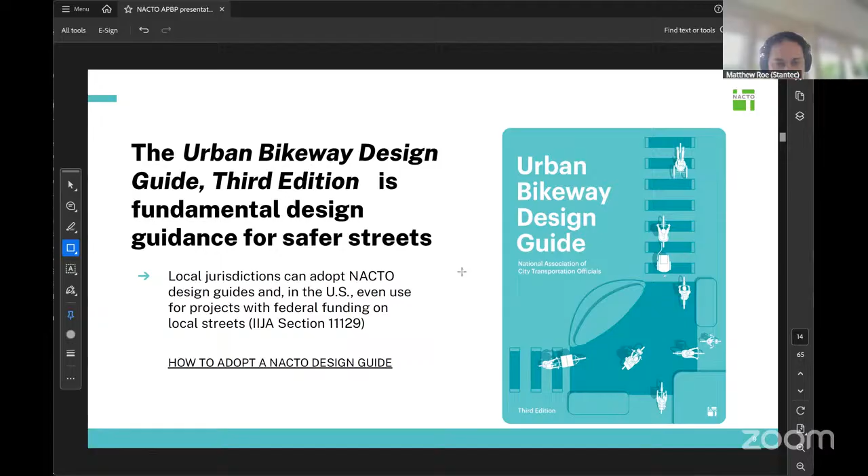That's part of the IIJA bill, as it was also called. On the NACTO website, there's guidance on how to adopt a design guide. You can also adopt FHWA's own guidance. Believe it or not, FHWA's published guidance, like the Rural and Small Town Multimodal Networks Guide, which is a great guide that we drew from, is not automatically used on FHWA funding sources. You have to actually adopt it if you're going to use it locally.

So with that said, what's new, what's updated? We updated almost all of the protected bike lane, bike boulevard, and what we called constrained bike lanes, so marked conventional 5 or 6 foot bike lanes. We updated how traffic signals are dealt with, and we updated the wayfinding section, everything in green here. The design tools section is actually quite long.

That's a bunch of more detailed drawings of small features like refuge islands or neighborhood traffic circles, things you might be implementing on any kind of bike street, whether it's a bike boulevard, a marked bike lane, or some other type of street. We also updated how you manage vehicle speed and volume.

There was another publication between the second and third editions called Designing Bikeways for All Ages and Abilities, which was part of the inspiration for this guide. There's also a publication called Don't Give Up at the Intersection, and we adapted a lot of that material and updated it so we've got a very robust intersection guidance chapter. It's a large portion of the book—over 100 pages.

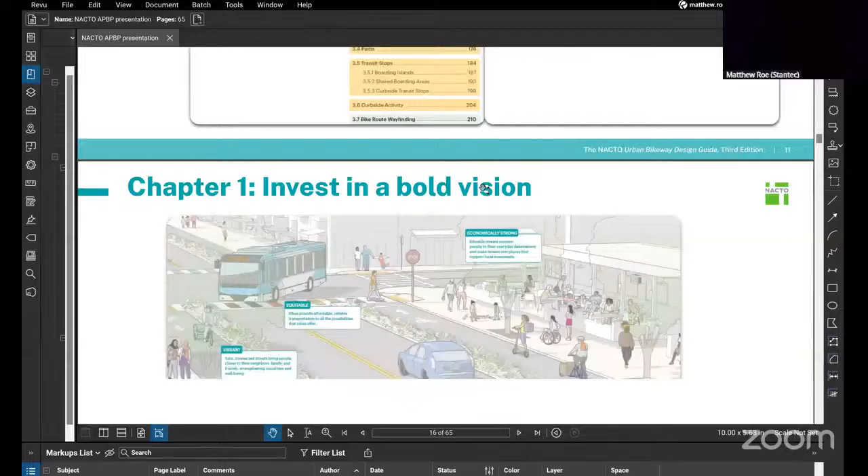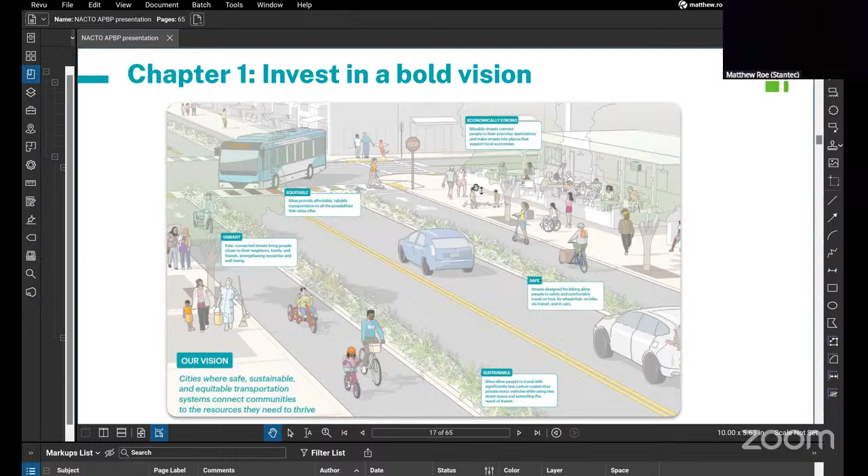You can probably see chapter 1 right now, right? So while some of your streets are going to look like this, especially in the busiest parts of a downtown core, even if it's the center of a village, or the redeveloped part of a major suburban arterial street, there's still going to be a lot of network that doesn't look like this.

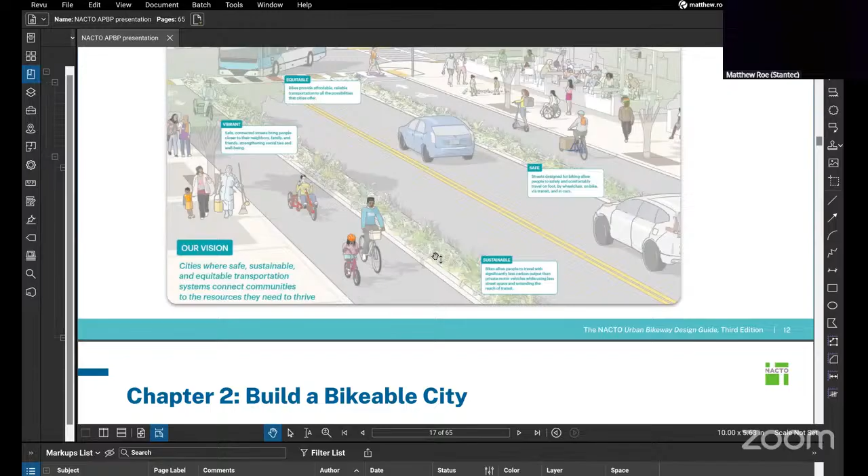The guide takes pains to actually deal with all of these route types, including neighborhood routes, and figuring out where the barriers to biking are. Where is it really difficult to cross a major street? Where are there types of infrastructure, like maybe a bridge that goes over a highway, that isn't suitable right now for biking and is really only designed for motor vehicles? So what are those kinds of barriers that we can start to address?

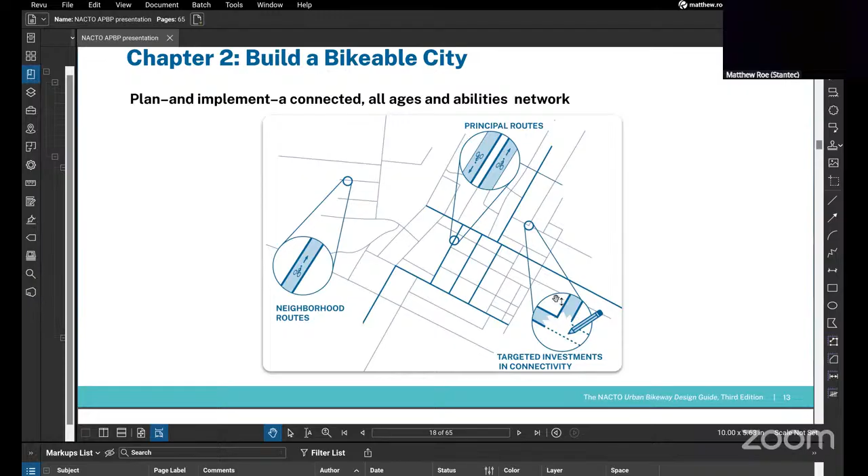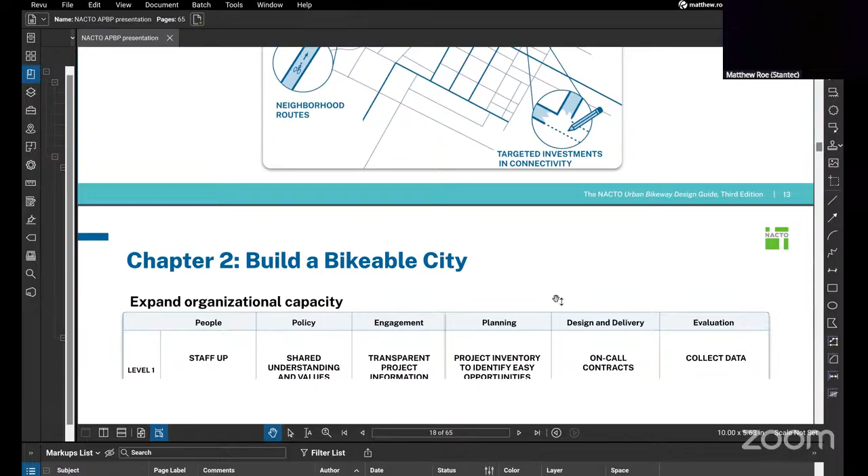And then the last part of that answer is going to be at the very end of this presentation, which is shared use paths, and in general off-street paths, which we didn't cover in the second edition, but we do cover in this edition. I'm going to skip some of the more procedural stuff.

But there is a lot of material about how to expand your organizational capacity, what kind of work has to be done. In bigger cities, some of this work takes longer. Smaller cities, villages, towns often have an easier time adopting supportive policies like a complete streets policy or adopting NACTO guidance, and coming to a shared understanding.

A lot of you have kind of that muscle already. And for a lot of bigger cities, it's actually the first time they've had to address some of these fundamental value issues of what they want on their streets. So I hope that answers that a little bit, James.

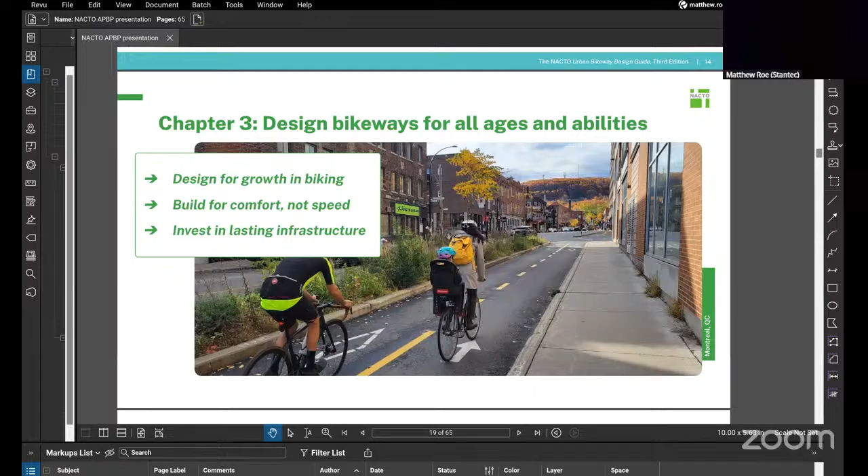Yeah, absolutely. Thank you. Can everyone see Chapter 3, Design Bikeways for All Ages and Abilities now? Yep. Great.

So there's an idea here that there's going to be growth in biking. I don't have to talk to this group about the difference between a confident rider and a less confident rider, or someone who will ride only if there's really good infrastructure. The vast majority of us will ride if there's really good infrastructure, won't ride if there isn't. And some of us fall somewhere in between.

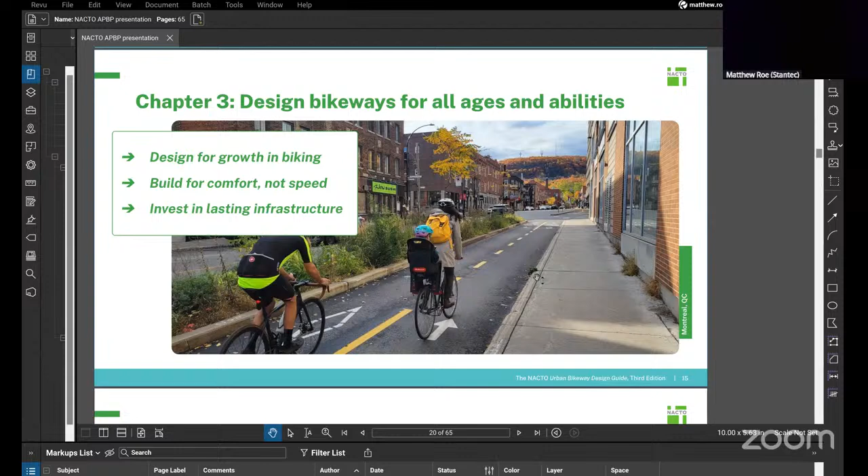So while a lot of the historic infrastructure has been designed for the person on the left—either wide lanes or shared lanes on major streets, or recreational paths—the growth in biking is really the person on the right. That's where we have the growth potential. And we see a lot of utility biking in the capital region. I think that's an important part of how we think about this: we still have a lot of potential for growth. We already have a lot of people who bike for transportation.

And that's who we're ultimately serving with the facilities in this guide. So all the way on the left side, we've got low speed, low volume streets. And then as we go through the guide, we get to higher and higher speed streets.

So we start with bike boulevards and advisory bike lanes, which are a type that have a lot of potential in the streets of the capital region. And then into protected bike lanes, which again have a lot of potential on streets that have excess capacity. A typical 4-to-3 lane conversion can often accommodate them.

But as we get into bikeways that require more investment, we get a lot more bang for the buck. Put that a different way: as we go to bikeways that require a lot more investment, we can capture even more of that market share of transportation users. So raised bikeways and off-street paths.

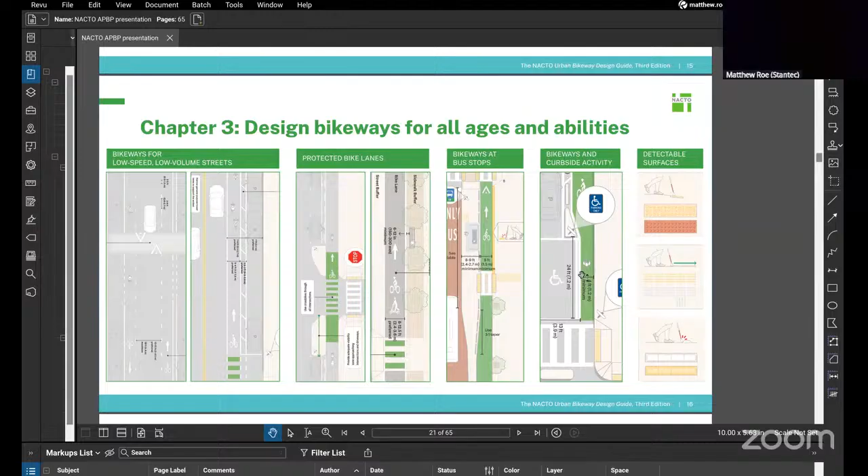There's detailed guidance on some of the crucial issues like bikeways at bus stops, which we know are often a sticking point for bikeways, and things like ADA-friendly loading zones. And there's detailed guidance on non-visual wayfinding and detectable surfaces.

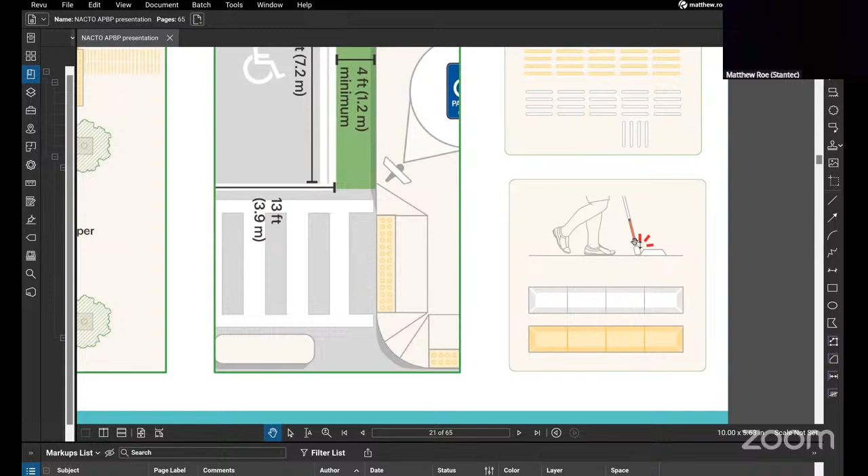This is an evolving area, including that very last item, which I'll zoom in on. There are new materials that are shaped such that you can detect them with a cane, but you can also bike over them safely. That can serve as separation.

There's a lot about designing bikeable intersections, like this example from Austin, where a lot of that land use context is more similar to what we see in the broader capital district than what you might see in Boston or something like that.

The idea here is that if we can provide distinct paths of travel through an intersection and slow down the turns, or separate the turns if we can't slow them down or if they're too high volume, then we can actually create intersections that work for everybody rather than intersections that are barriers, as they too often are today.

So too often, as a project designer and planner, we develop a great cross section and then we get to the intersection and just can't figure it out. So this guide should help with that.

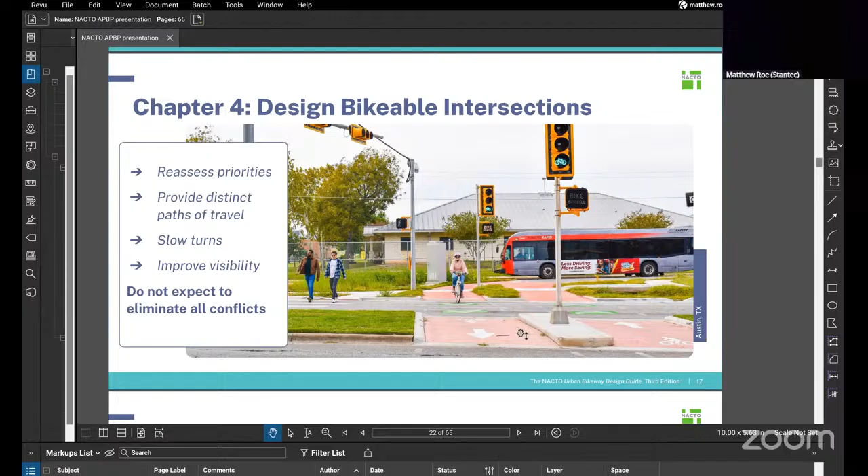It often involves trade-offs, but this is kind of the case when you have a lot of room, especially when there's an existing parking lane - you can create protected intersection geometry. And if the turn volume is relatively low, this works really well when you have that room.

Now, you might say, well, that never happens, but it does happen. A lot of larger urban streets that might have been originally designed to be the key route, but are now kind of supplanted by a parallel highway, really do have this kind of room.

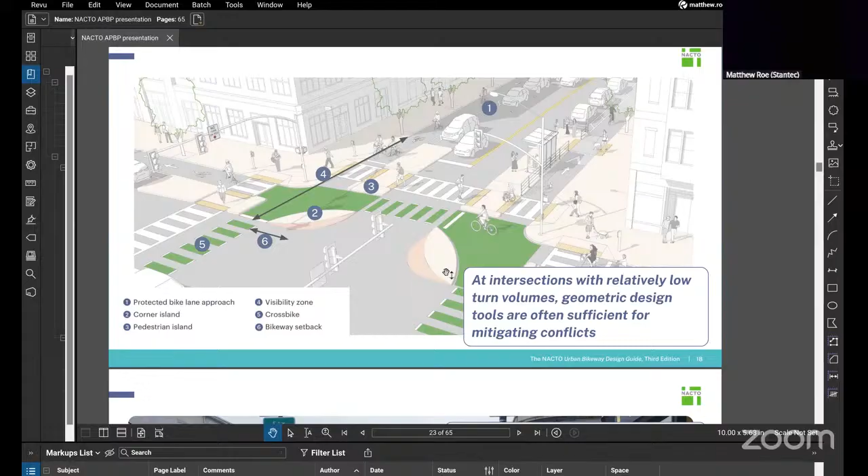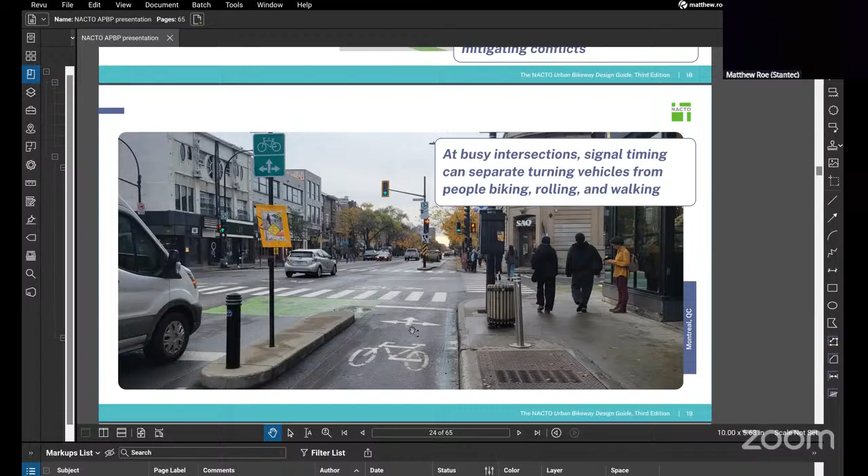At busier intersections, use signal separation to help people actually walk, bike, roll through the intersection separately from turns. This example is from Montreal, but there's a wide variety of US examples and MUTCD-compliant examples and guidance about when you should probably go beyond the MUTCD, the Manual on Uniform Traffic Control Devices.

There's detailed guidance on how many turns are too many turns. I'm not going to dwell on this, but there's a lot of signal guidance in here because we heard from people who use the guide, oh, this is great, but we need something besides just a fully protected signal.

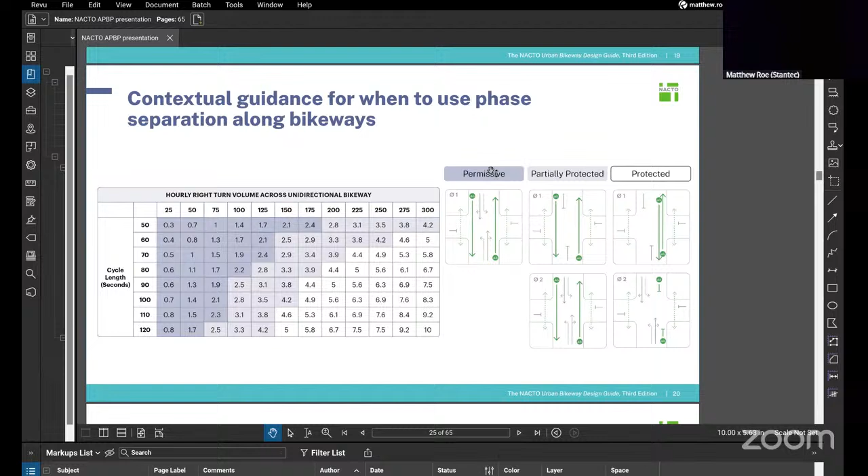We need to be able to give people a leading bike interval, which is also a leading pedestrian interval. We need some knowledge about when it's okay to have a green ball for cars and a parallel walk, and to let bikes go through at the same time. So that's what this is all about. Fundamentally, it's about making sure that when those drivers turn, they can actually see the bikeway.

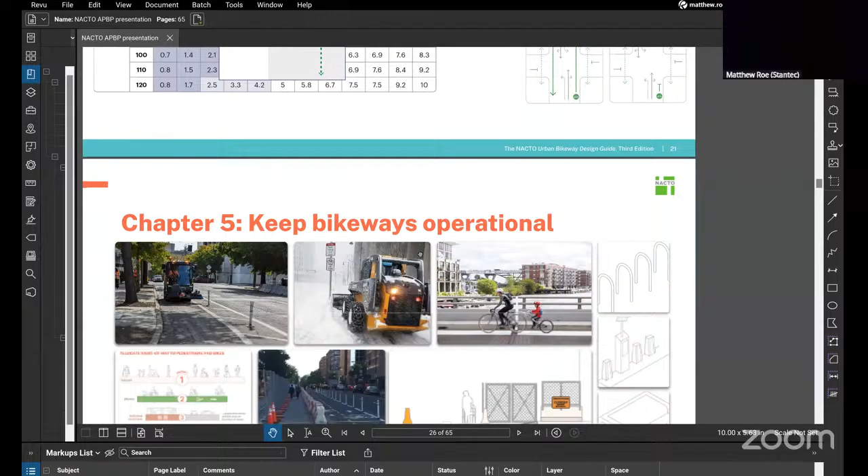There's also a great chat, and I'll finish up in just a moment. There's also a chapter on how to keep bikeways working even in the severest of conditions. And we certainly have those conditions here.

So learning from how Toronto, Montreal, Boston, and other very snowy cities, and Chicago, Madison, Wisconsin, and other very snowy cities have done it. There's detailed material about how the design of the bikeway influences what vehicles you can get down it.

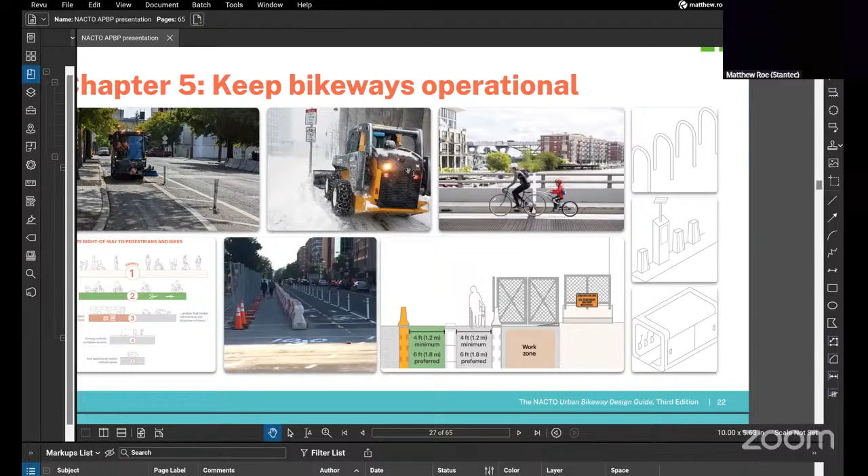How those two have to some extent be a two-way street, pun intended, where you are making decisions about what kind of maintenance vehicles you're using, both for sweeping and for snow clearance, and also what widths, what clear widths you're using.

So often that's a constraint, and you say, oh, well, we can't do a protected bike lane because we need to sweep or we need to plow. That's a choice. It can be expensive to transition, it can be time consuming to transition, but that's an important decision that we as jurisdictions may have to make if we're going to get to a protected bikeway network.

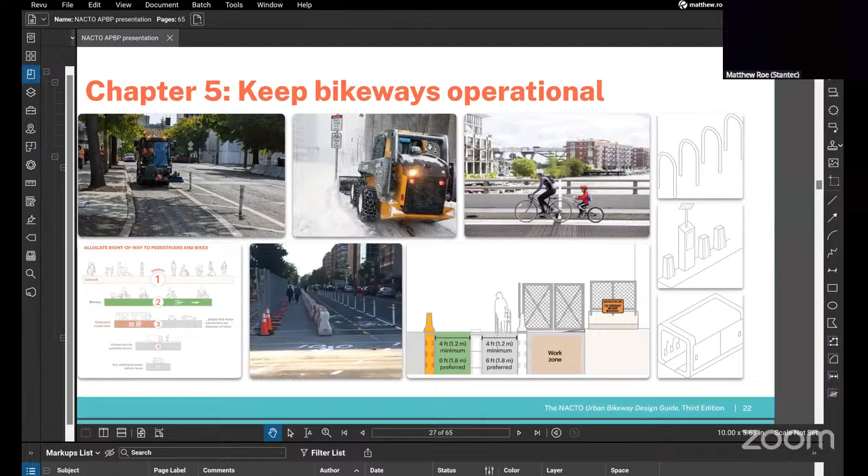And sometimes we're going to decide no, it's not worth it to do that. Sometimes we're going to decide, well, we need to do a buffered bike lane now and build toward a shared use path later. Those are the kinds of decisions that this chapter guides you through.

Okay, so that's that for the guide. I believe that this webinar code is still working, but that I can check on. But nacto.org/bikeguide or islandpress.com.

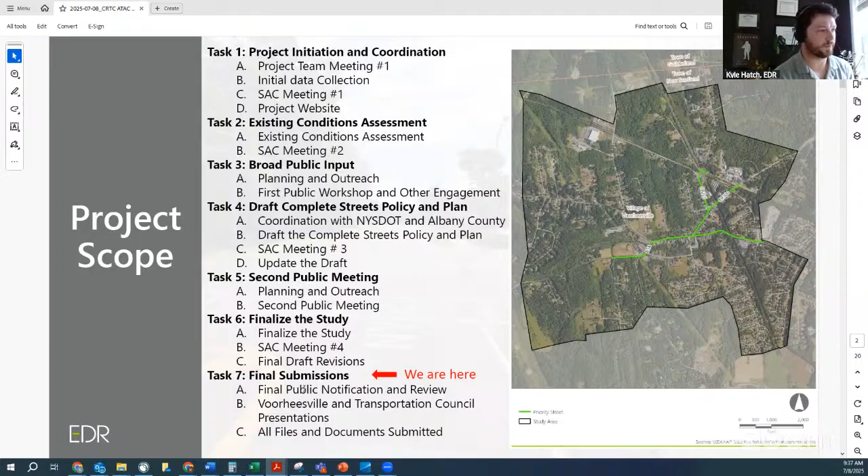Again, just a little bit more background information to help set the stage. We established a project vision and goals very early on. I don't think the group needs to read through the project vision, but the goals are pretty important for the context of everything else I'm going to be presenting on the policy and recommendations.

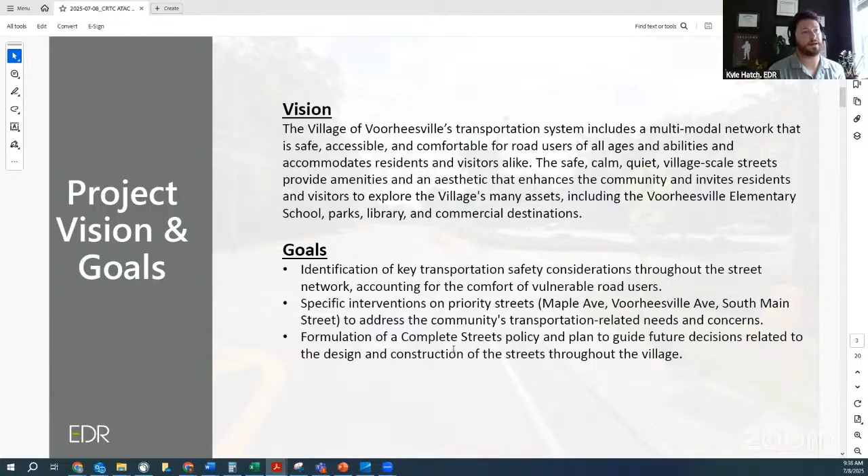The goals of this study were to identify transportation safety issues and specifically account for the comfort of vulnerable road users. That's important because we were also looking at perceptions of safety, not just actual safety based on crash figures. We wanted to look for specific interventions on priority streets—those were the green highlighted streets I just showed on the map above—and then develop a complete streets policy and plan that would guide future decisions for the village.

In terms of demographics, it's a very family-oriented community. There are a lot more children in the village than we found when you compare it to the town of New Scotland, where the village resides, or Albany County overall. About 1 in 10 residents have some kind of disability that impacts their ability to get around.

Looking at land use and zoning, most destinations are concentrated within the village's historic center. It's an old railroad town, so most things are based near the old railroad centers. The village has recently updated zoning to encourage more mixed-use development in existing commercial destinations. So we're not looking at any sprawling destinations appearing on the outskirts of the village based on their zoning—they're trying to concentrate everything where there's already activity.

For the transportation system, the state and the county own the most heavily trafficked roads, and those are also where the commercial corridors are, so the village has limited control over those roadways. The village is also the end of the Albany County Rail Trail, which creates a unique opportunity for recreation and active transportation. Really, their Main Street corridor could thrive off of the traffic that comes in from this rail trail.

Looking at traffic, crashes and safety, we looked at vulnerable road users and found that every crash in the village that involved a vulnerable road user resulted in injury, and the number of those crashes was trending in the wrong direction—more vulnerable road users were being hit the more recent the data was. Most of those crashes are concentrated on the state and county owned roads.

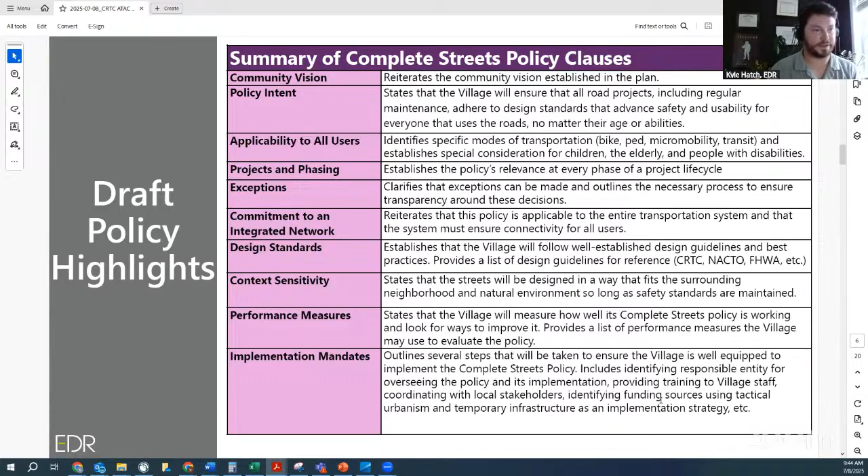This is where we started to get into some new things. I created what we're calling supplemental design principles, based on my experience seeing where things might slip through the cracks in a traditional Complete Streets policy. We broke it into two sections. The first is what we're calling Universal Principles to Promote Safety, Accessibility, and Comfort. Really, there are three main things we're pushing for here.

This clause defines pedestrian travel speeds. We've seen that under MUTCD there's a good amount of flexibility—anywhere from 2.5 feet per second up to 4 feet per second is an allowable pedestrian travel speed, which impacts things like light timings, and if somebody pushes an RRFB, how long those lights flash to let a pedestrian cross the street. We're saying the village is setting the standard speed at what MUTCD says an elderly person may travel, since we specifically called out that population in the policy. We want to make sure engineers are designing crossings for the speed those people will actually be traveling.

We have another clause pushing for limiting curb cuts and maintaining consistent sidewalk elevations. The village has a few roads with a lot of private driveways on historic homes, and what we saw with brand new installed sidewalks is a lot of up and down over these private driveways—on a quarter-mile stretch, a person might go up to sidewalk level and down to driveway level 13 or 14 times along a block. So we're recommending that be limited as much as possible, along with access management for commercial destinations, trying to have one driveway access point in and out, just to reduce how many times a person with a mobility impairment has to navigate that small hill.

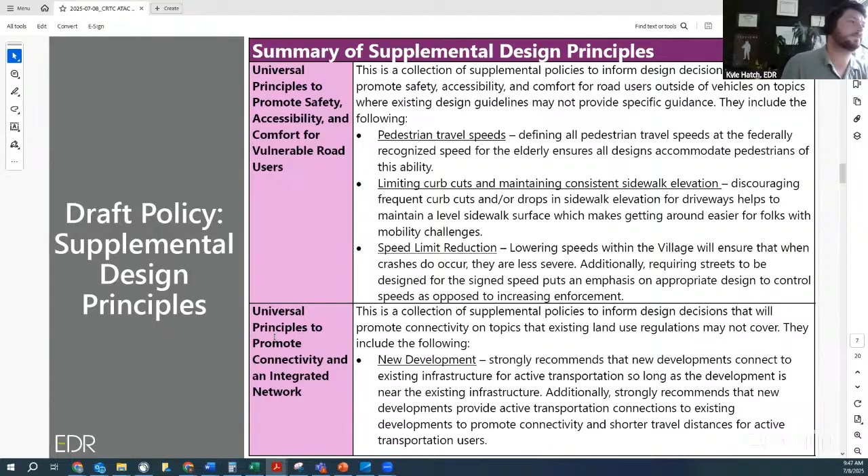So we didn't want dead-end streets for bicyclists and pedestrians. You can use a cul-de-sac to dead-end a street for a car, but in future development, bicyclists and pedestrians should have a path to go through, basically giving them a grid for the shortest path to get through places. That covers the majority of the policy.

How this policy is applied also comes down to this aspect of assigning road typologies. This is something CRTC does on a lot of their funded complete streets plans. I really like it a lot - it makes the process pretty clear. It basically requires you to identify the purpose of each street in a community, and then the appropriate design for the street based on that purpose, by classifying them as typologies.

After that, we designated main streets and commercial corridors. This is literally the village main street, and it is actually called Main Street. This is where all of the historic mixed-use development is really taking place in the village. These are county-owned roads, so the land use here is mixed or commercial. The lot sizes are typically small, things are walkable. Traffic counts are a little bit higher than the residential streets, but still nothing very, very high.

And then after that is regional connectors. These are primarily the state-owned roads. There's a mix of commercial, residential, and some mixed-use development. The lots are typically much larger and spread out, though. If you find a commercial lot, this is like your traditional strip mall or big box type of development with a massive parking lot in front, primarily designed for cars. The traffic volumes on these streets are much higher than what you would find in the rest of the village, and they also carry a considerable amount of freight.

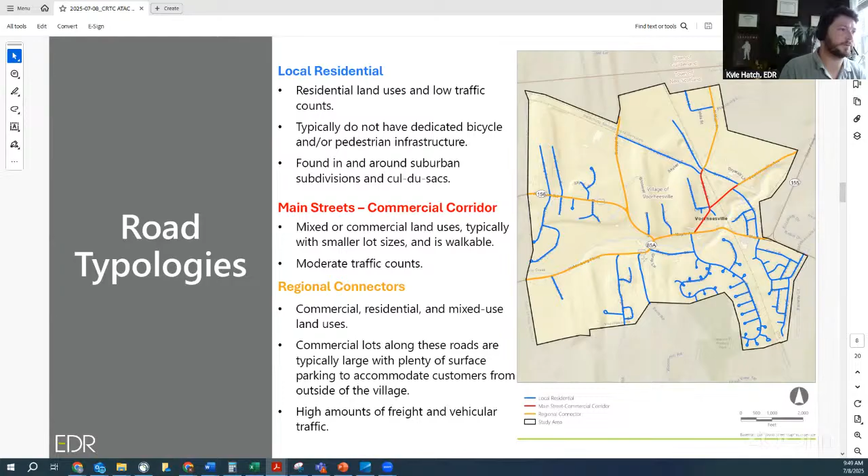So we tried to add - I would call them tiers - three tiers of importance or priority to these design elements. We have mandatory, which is pretty much as close as we could get to legally requiring elements to be installed. We didn't do the full legal requirement because the village doesn't own several streets. So these mandatory design elements are basically the things that we're encouraging the village to push very hard to make sure they get.

After that, we have preferred design elements - those may be excluded depending on the context. And then we also have context sensitive elements, which are usually not going to be appropriate, but given certain situations, we're telling the village to look at the viability of some of these things.

So for example, a curb extension or a bump out - most of the time the village streets don't have existing sidewalk networks, and so those things might not be appropriate in like a cul-de-sac subdivision. But there are some developments where there's a little bit more traffic, the subdivision is right up against the main road, and so maybe those curb extensions or bump outs are appropriate in those specific locations.

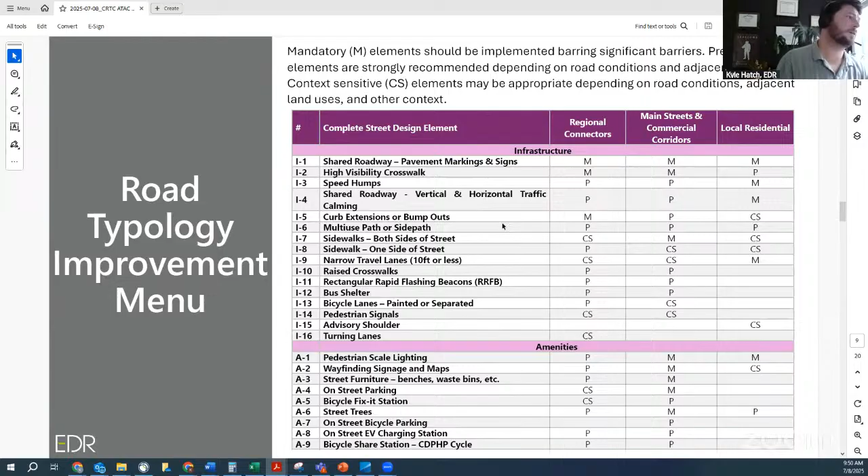Moving on from that, we developed 3 conceptual designs for priority areas within the village. These were locations that we heard a lot from the community about needing some kind of improvement.

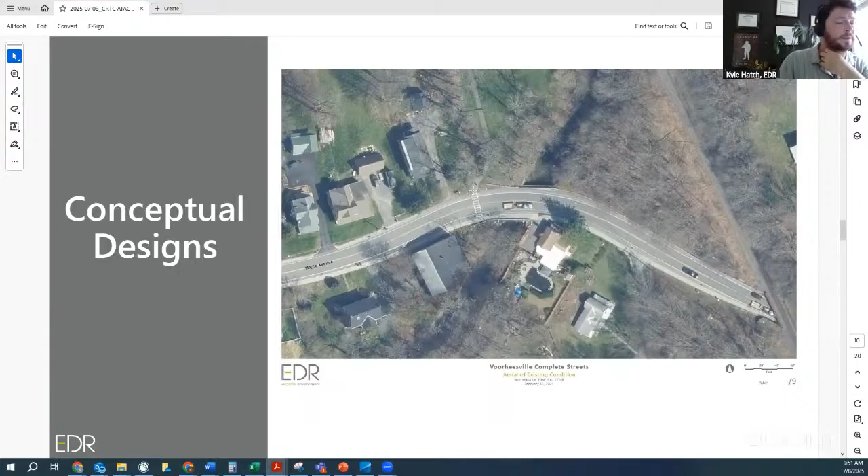This first area we're looking at is a mid-block crossing on New York State 85A. It's basically just this crosswalk, which connects to a village park. Because of the turn and the location of this house, this is a blind crossing, so a lot of residents talked to us about perceptions of safety here. Obviously we can't move the house, but we can do everything possible to slow down traffic and make the crossing as visible as possible.

So we increased the width of the sidewalk in a couple places and made the lanes more narrow, specifically on the southern lane. We got rid of the shoulder and bumped the sidewalk out all the way to the travel lane. We're proposing a raised crossing here. It's going to be very difficult to do on a state-owned road, but as a conceptual rendering we went with what the village envisioned, figuring they could start at that high point and negotiate with DOT down to whatever is acceptable. We're also recommending RRFBs or something similar.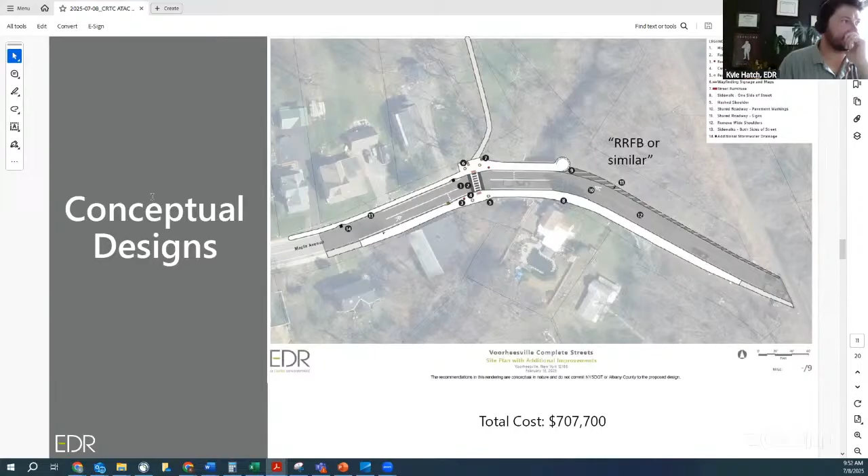On the north lane, there's not enough space to continue a sidewalk because of this railroad bridge, so it gets very narrow. We're recommending some striping on the shoulder to give the visual appearance that the lane is more narrow than it is, without a physical barrier. We also recommended extending the sidewalk network on the north side of the road all the way up to a main intersection, which we'll see in the next design concept. There's another small park up there that we recommended have a direct sidewalk connection.

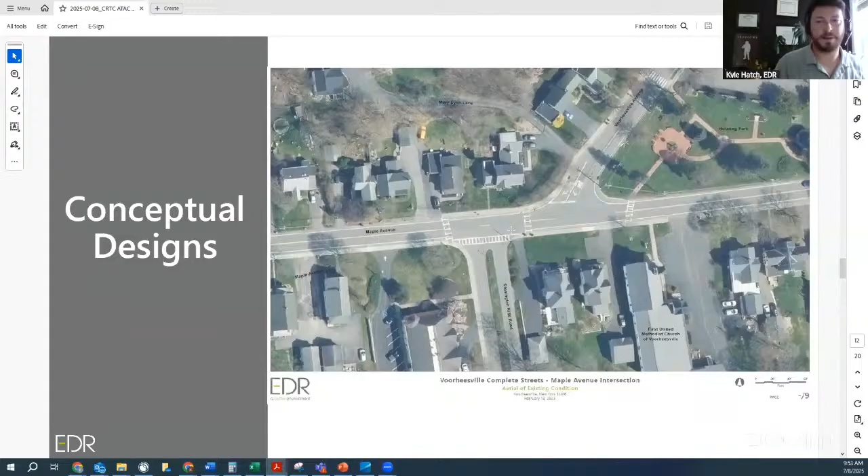This is that next intersection we were just looking at, which would have been off to the right of our screen. This is an intersection with New York State 85A, Voorheesville Avenue, which leads to their main street further north, and Stonington Hill Road, a pretty big suburban subdevelopment. This is the existing condition. The geometry of these two streets makes this intersection a little bit tricky. We examined a lot of potential solutions, including a small peanut-shaped roundabout, but there were very limited options given the right-of-way constraints at this location.

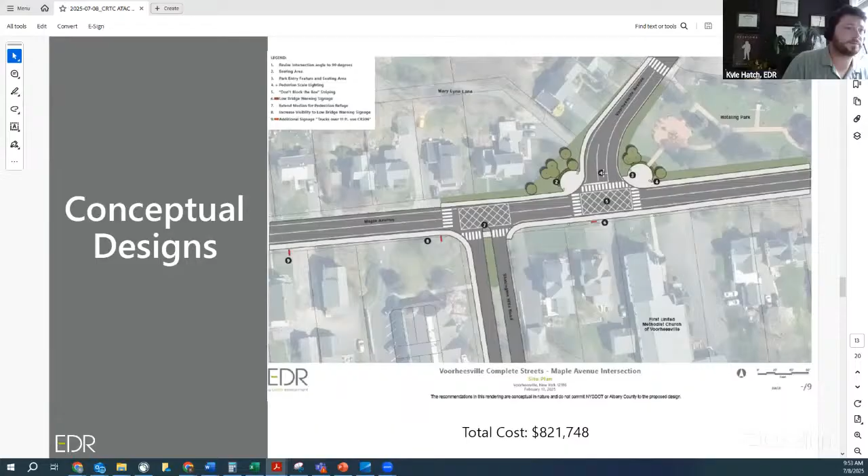So this is what we recommended: basically adjusting the geometry slightly to give us more space between these two roads. Voorheesville Avenue turns off a little more sharply to give it a 90-degree intersection with 85A. We've put in some 'don't block the box' striping because residents told us traffic gets backed up and blocks these intersections. So even with more space between the roads, we wanted the striping to remind people to keep these intersections open. We added a pedestrian refuge island on Stonington Hill Road and redesigned the geometry of the crossings a little bit.

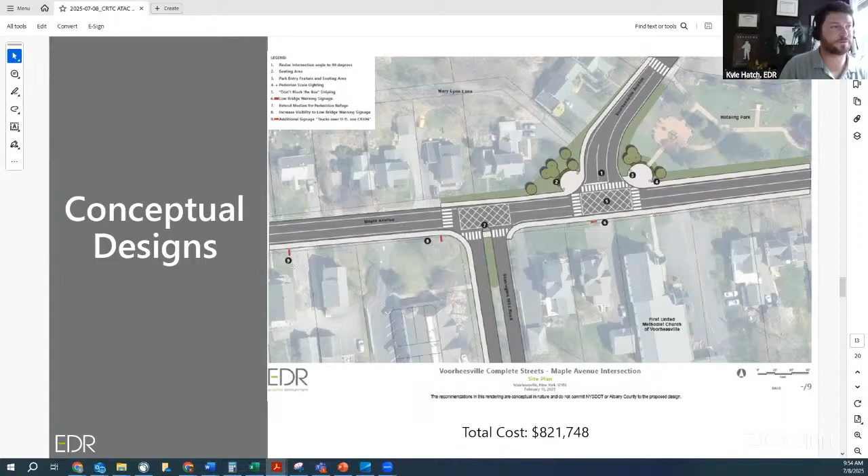With the park space that was lost to fix the geometry of this intersection, we added more green space on the other side to give somewhat of a gateway treatment on the way into the core part of the village. I'll also note these small red dashes are updated signage to warn trucks and freight vehicles of the low bridge, which would be off screen to the right. So we've also proposed redoing that signage.

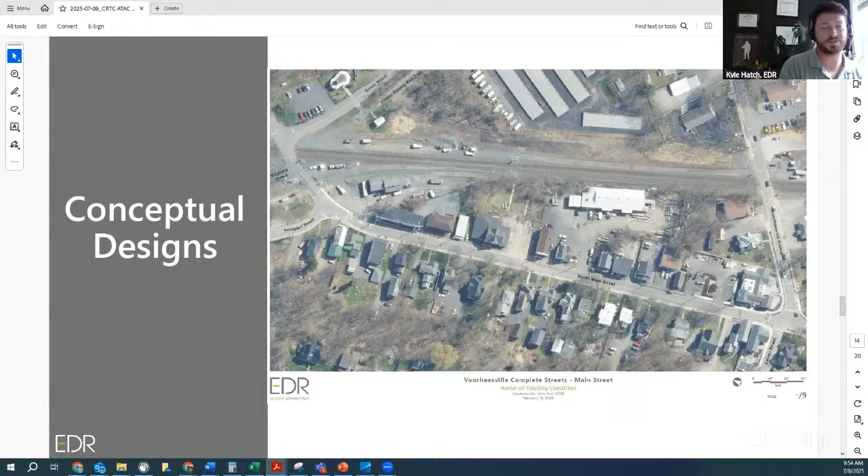So what we've done here is a number of things. First and foremost, the biggest change is that the village acquired this property shown in green here, and they are currently evaluating the condition of the building to see if it can stay up. But they are proposing turning this into a municipal parking lot.

So there will be a municipal parking lot here. To accommodate the utility poles, we have extended the sidewalk out and removed some street parking spaces, so now the utility poles will be in the street parking areas. This also creates space for people to put garbage cans.

These residential buildings and commercial spaces were putting their garbage cans right on the sidewalk, and that was another accessibility concern. So now there's space for the utility poles, space for mailboxes, space for garbage cans, which frees up the sidewalk space. Those parking spots lost to these bump-outs will be covered by the municipal parking lot being installed.

We're pushing for pedestrian-scale street lighting. Currently, this road is lit with traditional cobra-head style lights, the very tall highway lighting you would see. We've also added some gateway elements near the rail trail.

We are pushing for the village to continue a sidewalk connection across the railroad tracks here, right to the trailhead. They've been having issues negotiating this with the railroad company, but what we're trying to show is the ideal situation the village has asked for, so they can take it and negotiate down with the railroad. Part of this includes pedestrian gates at the railroad crossings, so those are drawn in as well.

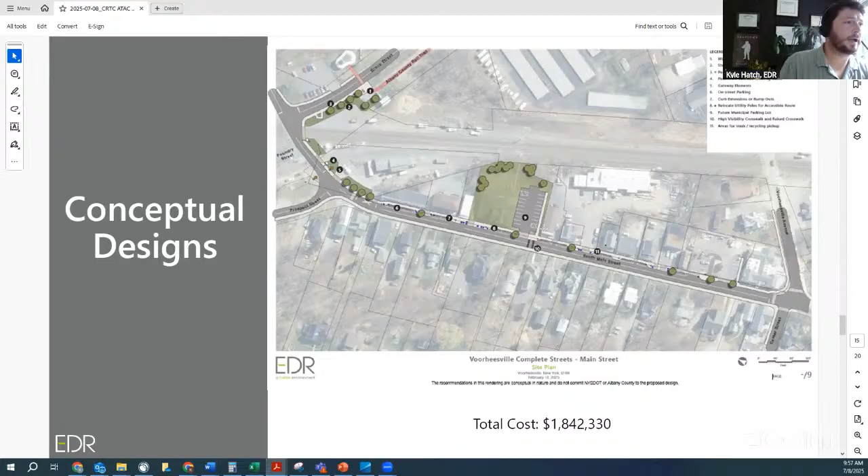I know I skipped over some details, but I'm just trying to get through those things quickly so we can get to the recommendations. I think this is probably the core of what people might want to talk about.

We've bundled our recommendations into a couple of different categories. The first is looking at schools. The village has acquired some property and built additional parking lots that function as overflow parking for the Voorheesville Elementary School at a location they call Torx Hill. They also entered an agreement with St. Matthew's Church, about a quarter mile from the elementary school, to use overflow parking lots there. We're recommending that the school speed zone be expanded to include the areas with those parking lots.

We worked with our New York State DOT partners on the advisory committee for this project and found that school speed zones can actually be applied to daycare facilities and other after-school programs. There are several daycare facilities on roads with speeding issues, so we're recommending these daycare facilities be included in the school zones within the village.

With these new parking lots around the elementary school, the way the existing crosswalk system is set up doesn't really align with how people actually walk. We've been hearing that a lot of people are jaywalking to find the most direct path to the school. So we're recommending the village engage in a small study to look at all the crosswalks serving the school and try to consolidate them to the locations that make the most sense.

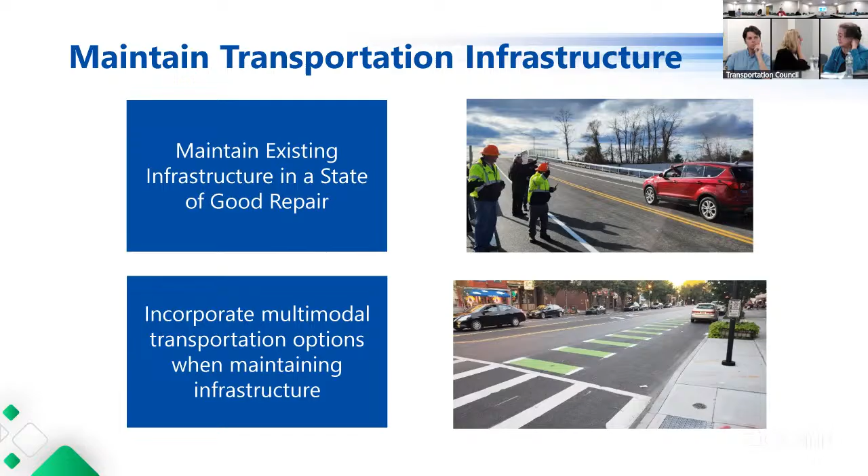Next slide. We collect a lot of condition data, and traditionally it's been focused on roads. But we want to expand that to include the condition of our trails and sidewalks, because more and more things are aging in that space, and we need a methodology through which we can develop plans for maintaining that infrastructure as well.

So we're going to be embarking on identifying some data collection activities. And as Ethan just described with our current TIP, we're going to have to reach out for more funds. We do not have enough funds in the capital region to do all the work we want to do, so we're exploring discretionary grants and other alternative funding tools. It will be some additional work on our part.

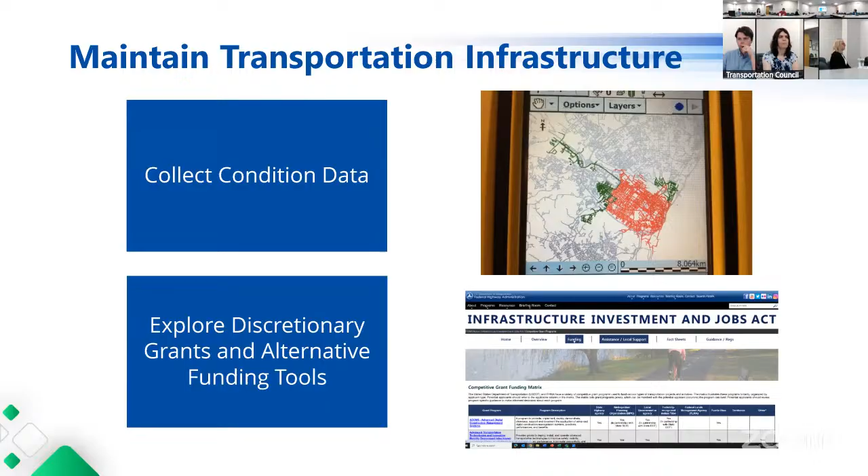Next slide. This focus area goes without saying, it's heavy duty on active transportation. One of the things we wanted to emphasize in the plan is developing an active transportation, or complete streets, network. Think of this like how we categorize the national highway system, with a map and series of roads all identified. We want to do the same thing for active transportation.

And truly develop a priority network, so that we can emphasize and make sure that all of those infrastructure initiatives are interconnected. Because we have a lot of locations in the region where we may have a 2-mile stretch of bike lane and then it stops, or a 3-mile trail and it stops. So we want to make sure these things are interconnected, and that's the point of the network.

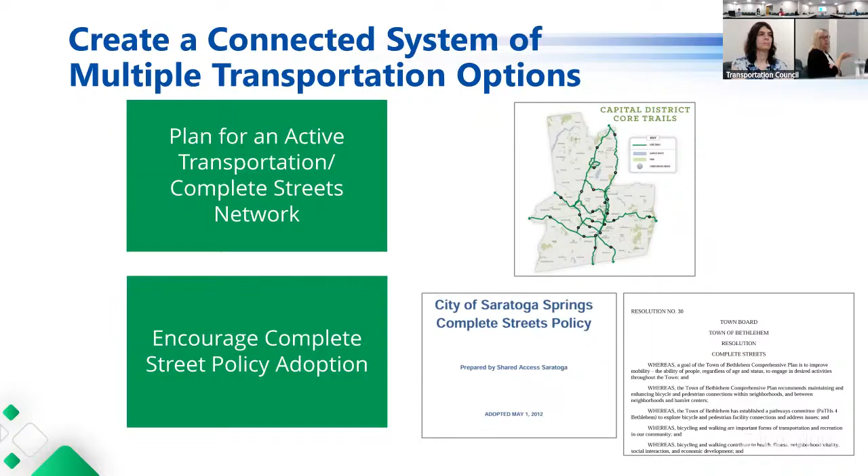We're going to continue to encourage complete streets policy adoption. We have a lot of communities that have done that already, and we can continue to encourage that.

Next slide. We've been putting a lot of work into our Vision Zero Regional Safety Action Plan, and there are going to be a lot of recommendations that come out of that. We want to make sure we support investing in improving safety and emphasizing our vulnerable users, particularly our cyclists and pedestrians.

We also want to encourage the use of universal design techniques, because if you're designing for a range of users, it's going to benefit all of us. So we want to make sure we encourage use of universal design techniques when possible.

We also want to quantify the benefits of active transportation. We need to do better at emphasizing the economic benefits, the public health benefits, and trying to quantify some of these things. We're going to be looking at some tools, some of which we've already explored, to fine tune this, and then this can be incorporated into how we assess projects for our TIP.

Right now we don't have these kinds of metrics to utilize when we're assessing the value of a project. We can also use this information with decision makers, since sometimes we hear, well, rec trails are just for recreation. Well, they have a lot of other benefits too.

So we want to be able to quantify those and make the case for why investing in these active transportation facilities is important. And where we have underutilized infrastructure, much like we had with the Skyway and the old ramp it was created out of, can we adapt it to include active transportation facilities? So we want to explore those opportunities as well.

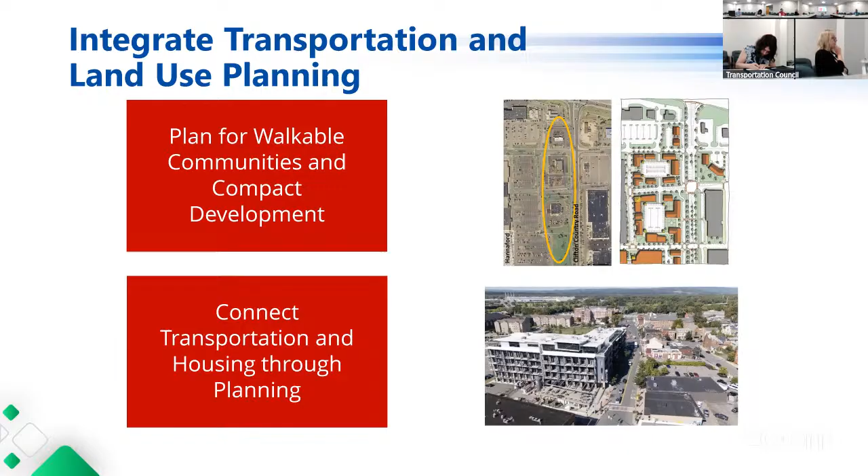Next slide. We also, along with the affordability of housing, see affordable transportation options as an increasing concern, and truthfully, nothing's more affordable than being able to walk and bike. So again, another consideration for implementing more active transportation options.

And as CDTA and other entities get more and more into mobility hubs and these intermodal facilities, we want to make sure we're planning for that first and last mile of transportation. We're thinking about whether there's a bike share stand, or enough supportive infrastructure around the bike share stand to be something the average person would use, and what other tools need to be implemented to support active transportation in these areas.

And the final grouping is, again, there are so many plans now, many of which were required under the infrastructure law at the federal level. State DOT, if you don't already know, just released their draft statewide transportation master plan for public review - it talks a lot about active transportation. CDTA is a big supporter of active transportation, given that their riders are usually accessing their system by walking or biking. And then us, as the MPO, have a range of plans. We want to make sure all of these plans are interconnected and integrated in whatever way possible.